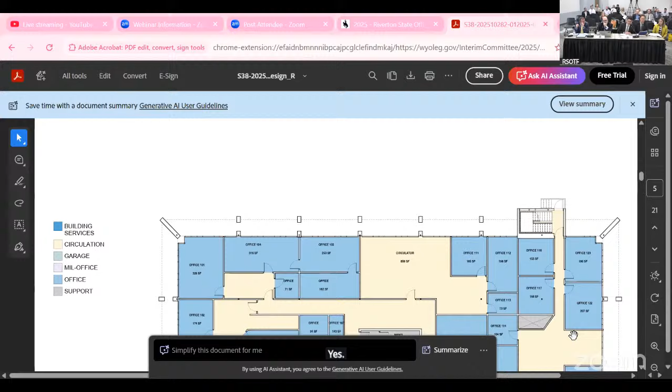CMU is a block, just a concrete block. That's where the current bathrooms live and provide shear for the floor. But for the most part, the rest of the floor is just infilled framing, which allows us to remove a lot of those infills without really damaging the structure at all. And then we can come back with that infill to appropriately scale and size the rooms as needed for the program.

On page 7, you'll see this is the upper level floor, and what you can see on the existing floor is that most of the offices were pushed around the perimeter of the building, with quite a lot of open space in the middle as well. The rooms, as we discussed, were for more executive level people, and they're quite large. So one of the purposes of revisiting this upper floor was to try to economize this, because we have quite a bit of program.

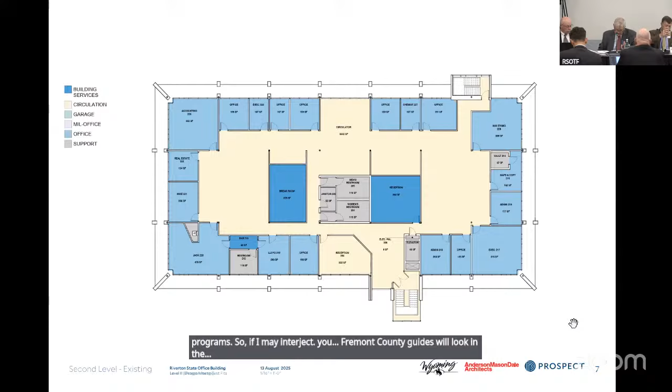So if I may interject, you Fremont County guys will look in the lower left-hand side, Jack 220 -- that was Jack Larson's room. Then above him is Mike Sweeler's office. Then you come to Max Evans' office, which was then turned into Scott Lormer's office. This is a fun document, a lot of history for those of us that knew the company that was there. It's pretty fun. Continue -- I digress, sorry. Thank you, Mr. Chairman. No, it's good. It's good color.

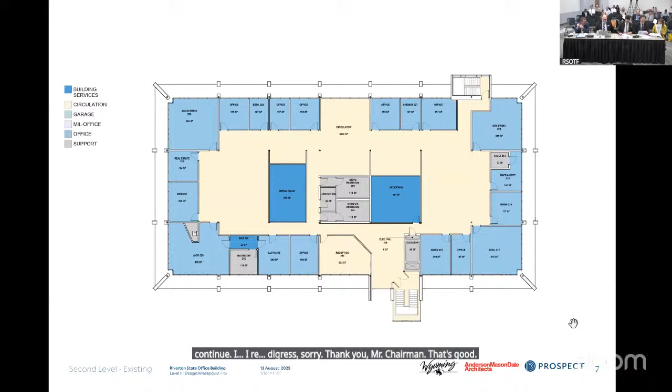So one of the other elements I think I failed to mention was that as part of the preliminary review of the building, a few things came to our attention as we analyzed it. The first thing we did was evaluate the existing structure and services in the building to ensure we knew what we were dealing with and whether there were any upgrades or requirements needed. Several things did come out of that.

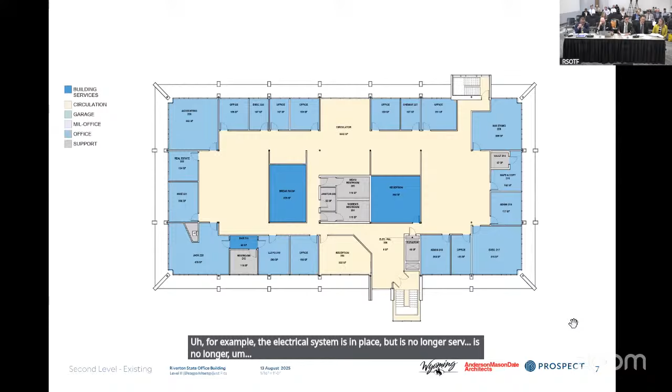Most of the utilities in this building are quite dated. For example, the electrical system is in place, but you're no longer able to get parts and pieces for it. So long term we're going to need to upgrade those facilities as well as the boiler and the mechanical systems. Those were things we noticed.

Additionally, the elevator was quite old and in a state that wasn't able to be repaired. One challenge we faced is that this is quite a small elevator, so for current needs and requirements we were going to need to expand that elevator shaft.

So that gave us a bit of the workings of not only what we were trying to solve from a program standpoint as it relates to fitting all the agencies in the building, but also what we needed to do to ensure this is a long-term and viable asset for the state.

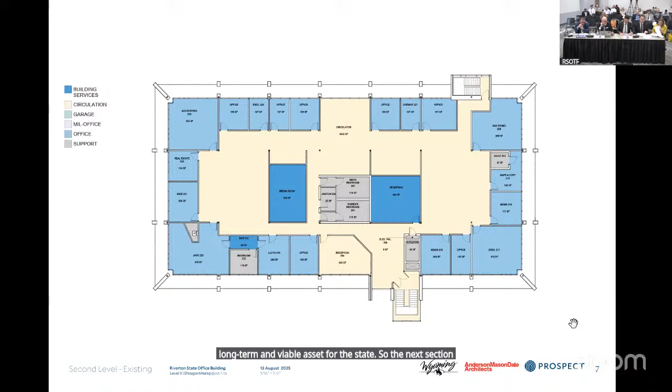So the next section you can see on page 10, this was the preliminary concept design. We've been talking predominantly about the building, but we also looked at the exterior parking and accessibility. As you'll see on the site visit, there's a two-tiered parking area. The drainage is quite bad, and it's not in great shape in terms of the paving.

So solving the stormwater issues on site was one driving force, and also positioning the parking lot in a way where we could maximize the number of spaces, while providing an opportunity -- as you can see in this document, the building is only a portion of the site. There's quite a large bit of the site on the south end. One of the original briefs was to look at this from a master planning standpoint, to ensure that anything we were doing in this first phase could set up a viable campus for the state long term.

By taking the parking out from just the front of the building, it allows us to create a pedestrian access to that southern portion of the site. I think the other really notable thing here is currently the state vehicles are parked within the same parking as the public. So what you'll see here is we actually separated this on the left coming off of North 8th Street.

You can see that there is a turn-in, which is where the current primary turn-in is. This would actually access a secured parking area only for state vehicles. It's also the access route to get down to the garage. So you would go through a state-controlled parking area in order to access the lower garage. We think that provides more security.

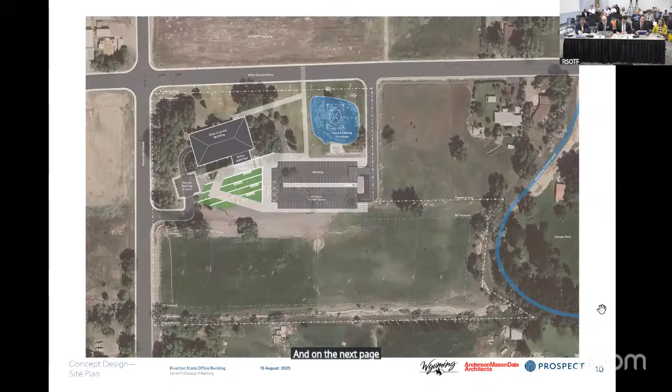So by replacing the parking here, we were able to reduce the amount of elevation going up to the building. We do have a long ramp, which is this diagonal element that comes up to the front, but there's a much more direct route from the parking area. So we were trying to solve for the multi-level condition that we are also seeing on the parking right now.

Page 12 shows a small axonometric view of what the building is going to be. This front element is an addition that we've added onto the building, which you'll see in the new plans. The reason for doing this is it allows us to rebuild that exit stair that we need in the front and also reposition the elevator so that we could build a new modern elevator. It also provides a kind of a front porch to the building and a more gracious entry.

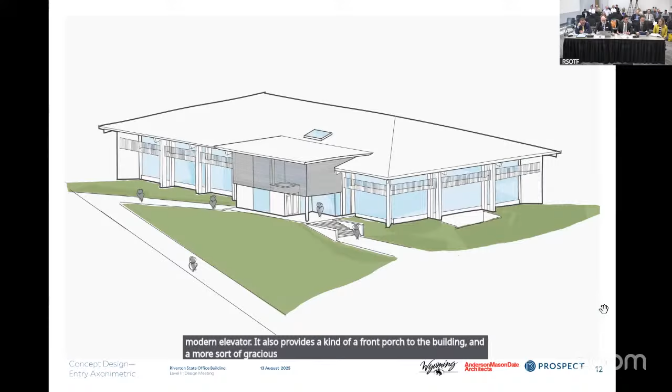When you go there now, you enter the front building and you come onto a landing and it's like a 7-foot ceiling. So this has a portion of double height space. It connects the second and first floor, and we think it provides more of an entry sequence that you would expect in a state facility such as this.

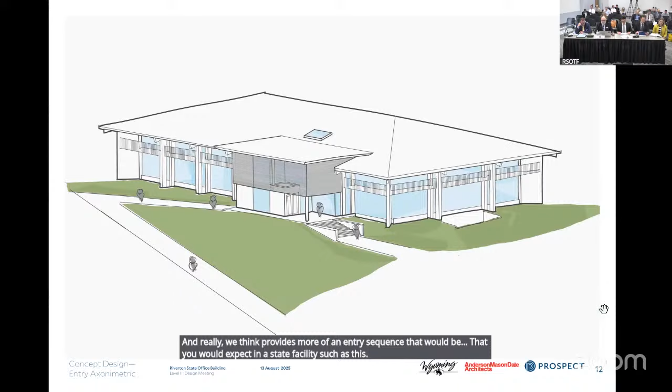So this concept imagery on the bottom is really just us starting to think about how to link this together and to provide some screening and connectivity for the building.

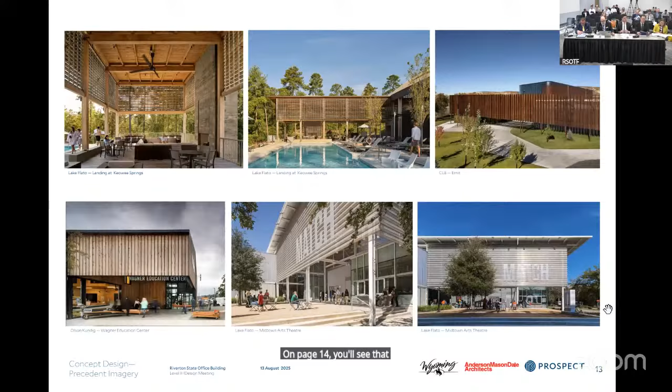On page 14, you'll see that these started to be the concepts design and plans for the new layout of the building. This is the subgrade plan. So in the parking, current garage area...

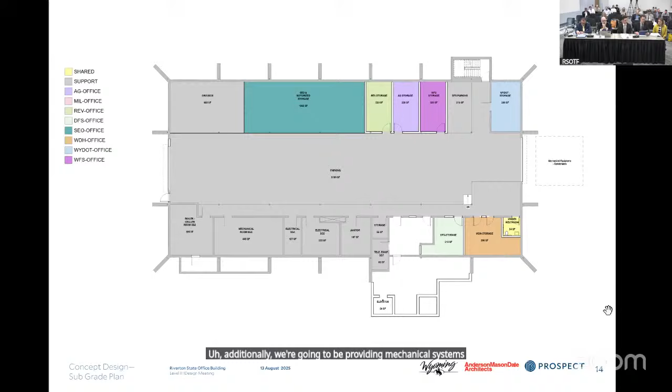We are basically using this area for storage, both for the grounds team, the state engineer's office, and then a series of the agencies that will be housed above, as well as the services for the building. Additionally, we're going to be providing mechanical systems. Currently, there's a chiller that lives in the front lawn, and this would allow us to bring that closer to the building, reduce the length of those runs, and provide a more accessible unit for maintenance, etc.

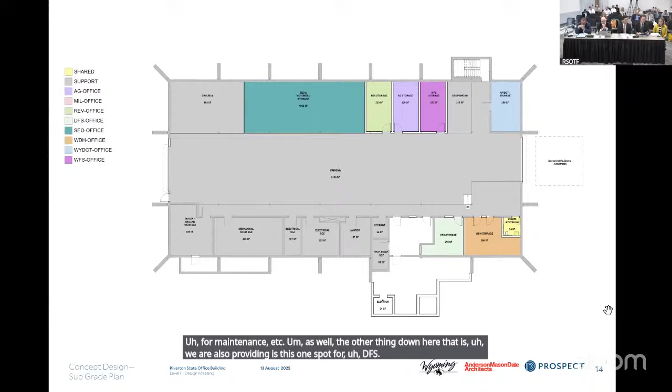As well, the other thing down here that we are also providing is this one spot for DFS, in the event that they need to bring someone and have straight access and not walk them through the parking lot. This will allow them to be able to pull a car in and go straight to the elevator and then take someone to the upper level.

So if I may interject there, looking to Jen, but of the agencies, DFS is one that has off-hour requirements to come at all hours of the day, and off times would have to have access at night and come in at weird hours, and this added a level of security for those employees. Have I got that accurate, Jim?

Mr. Chairman, that's accurate.

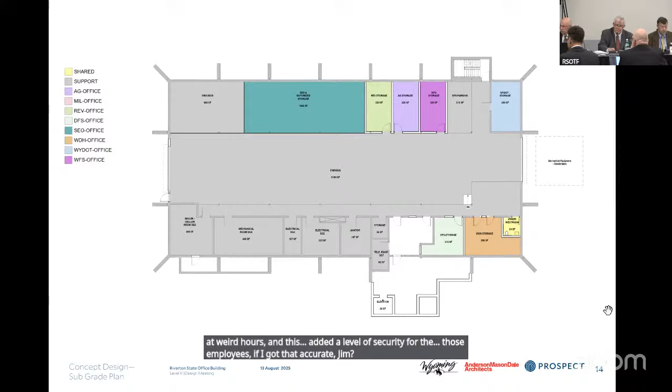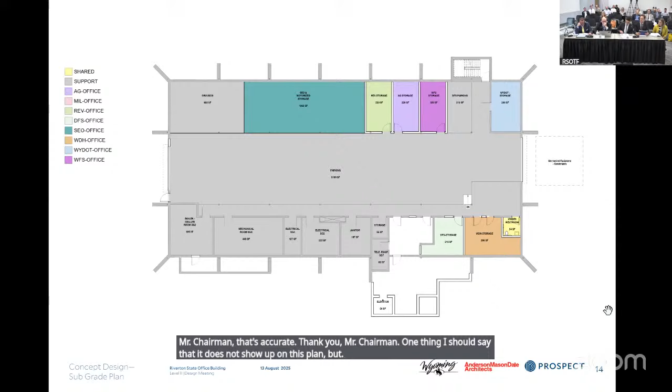Thank you, Mr. Chairman. One thing I should say that doesn't show up on this plan: the stair on the south side of the building would communicate all the way down to the subfloor, so that would be an access for us as well. That's just a drawing error on our side, but those stairs would continue all the way down.

Also, for the members here today, if you look at the bottom you'll see an SEO and motorized storage. As we looked at the agencies in Riverton, the one agency that we didn't move into the building was the state engineer's office. They had run out of room, and their office space was okay, but they have some storage needs. They're a regional facility, and some of the motorized vehicles and testing equipment they use up in the Bighorn Basin and other parts of the area are stored here in the winter.

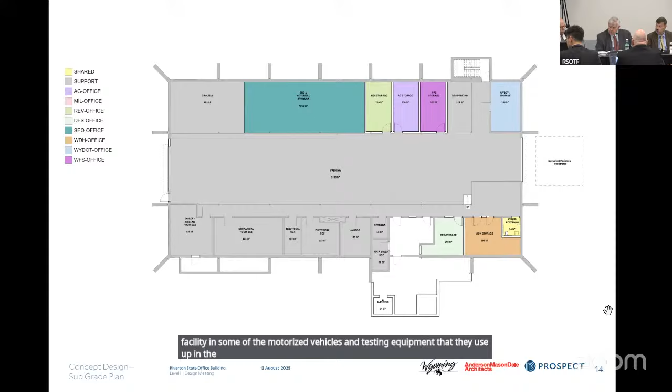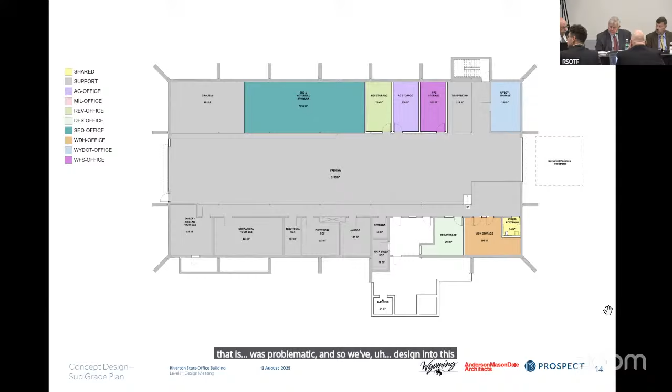They have a small storage building that they make repairs in and store things, and that was problematic. So we are designing into this lower area some space where they can keep their motorized vehicles in the winter, their side-by-sides, the boat, and some other things. That's why you'll see that agency on the lower floor, but no other place.

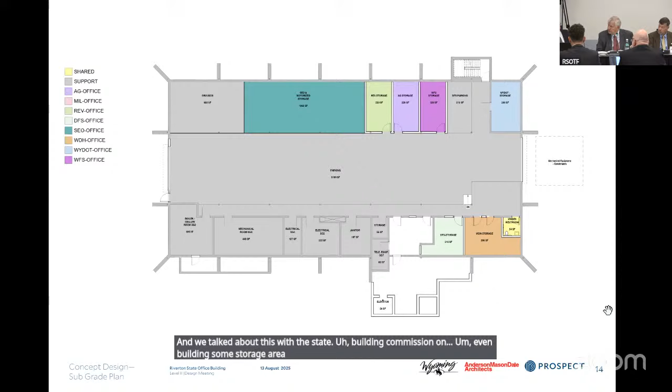There may be a time in the future on this campus, which we talked about with the state building commission, of even building some storage area for each of the agencies outside of this building. That will be a conversation in the future, but for right now, this is how we take care of the state engineer's needs, as well as the other agencies.

Thank you, Mr. Chairman. That's accurate.

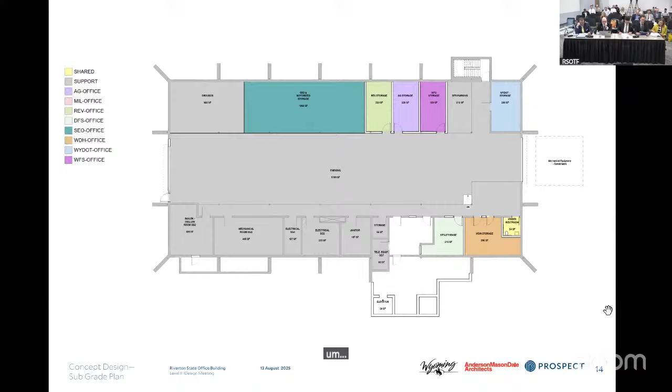Moving on to page 15, this is the concept design for the lower floor. If we start on the south of the page and move into the building, there is an airlock and entry where the elevator and new stair would be built. There's also the possibility and an allocation for a security desk, depending on how the building is staffed and run long term.

You can see we have three agencies on the lower floor with some shared space. One of the things we were trying to do in the layout of this building was to provide spaces that could overlap between the agencies so we didn't have redundant program, because once we did the programming assessment, the needs of some agencies were a little larger than the allowed footprint. So we were trying to consolidate some of that through shared uses.

You can see the Department of Workforce Services is on the left side of the building. They occupy the primary share of the lower floor. We provided new restrooms, since the current restroom facilities are not ADA accessible, so we're providing new ADA accessible restrooms on both levels. The yellow represents the shared elements.

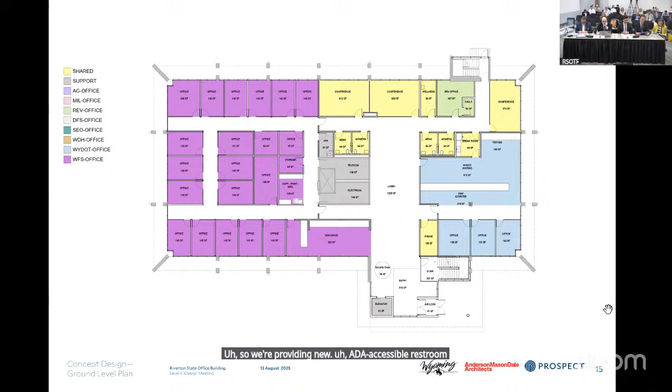The purple represents Workforce Services, and blue represents WYDOT. The yellow or white spaces are circulation, and we're sort of using that central space as a kind of lobby space for each floor.

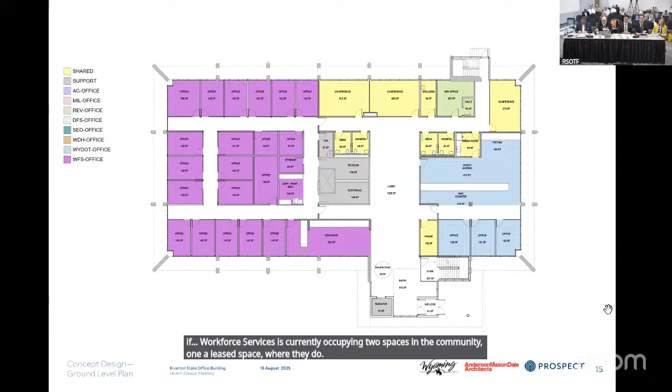If I may interject for my legislative colleagues: Workforce Services is currently occupying two spaces in the community, one a lease space where they do voc rehab. The reason that's a separate space is because the state-owned office space where the other part of Workforce Services is located isn't ADA approved. So they have a lease space for voc rehab, and there's a bifurcation of the agency that was a challenge.

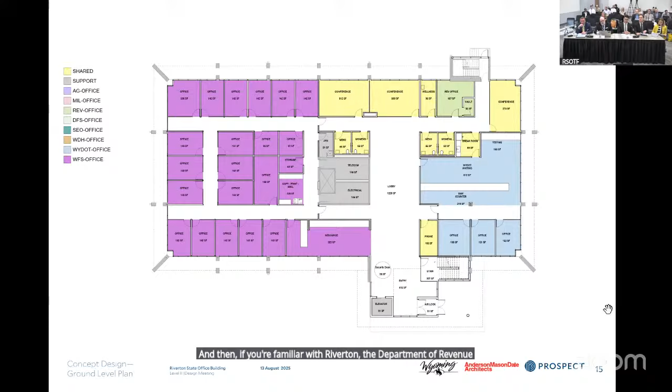This brings the whole agency into this level of the building. Off to the right, where you see WYDOT, that's our driver's license administration. They're currently there; we reconfigured that a little bit. And if you're familiar with Riverton, the Department of Revenue has this office kind of in the hinterlands, isolated and a little concerning. We're glad that we're able to bring them into this consolidation.

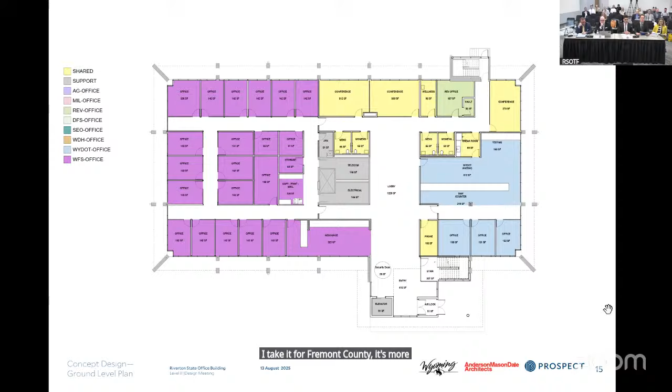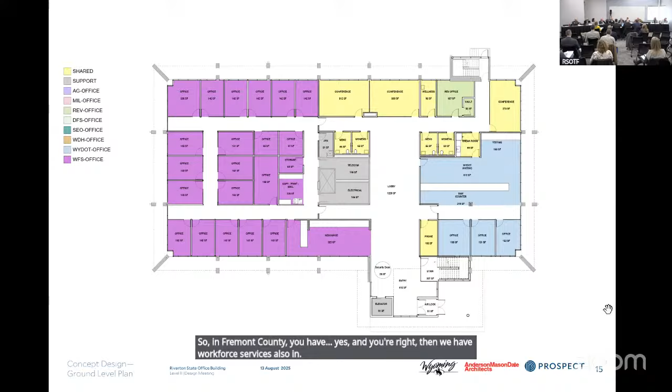Senator Dockstader: Mr. Chairman, Workforce Services then, I take it for Fremont County is more like a regional approach as far as rehabilitation, training, all of that, because a lot of the offices I've seen are just simply a little office. So in Fremont County, you have - yes, and you're right. And then we have Workforce Services also in an office in Lander. Thank you, Mr. Chairman.

Both the layout and development of these were in close collaboration with the agencies. So how you enter into the resource center and then have closed off access to the offices beyond were all things discussed through those agency meetings to make sure this was going to operate the way that best suited what they wanted to do in the space.

Same goes for the revenue offices. You can see there's a small vault in the corner, and that way for night drops they could drop directly into the vault. So all of those types of elements were things we were discussing with the agencies and went into this preliminary layout.

As we move into the level 3 work, we'll be developing this in more detail with them. But all of this was informed through multiple meetings to ensure we weren't saying, oh, it fits, and then having them say, but this doesn't work how we needed it to at all. So there was quite a lot of collaboration with them on that front.

As another example, the two shared conference rooms have a removable partition between them, because Workforce Services many times needs a larger space to do a job fair type of situation or have a speaker. So they asked that we combine those two so they could have one larger space when needed.

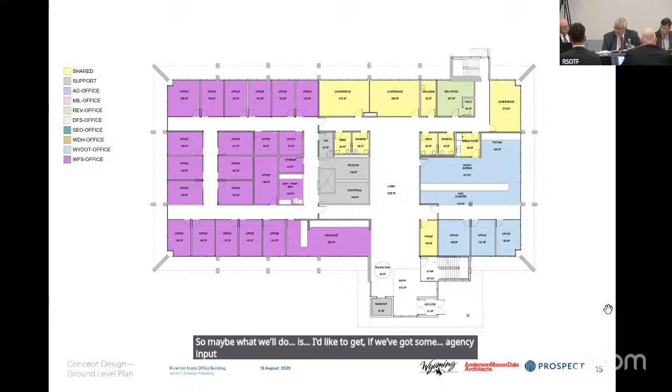If there's no questions on this floor, I'm happy to move to the other one. So maybe what we'll do is get some agency input as we've gone through that, just to make sure the agencies don't leave this meeting saying, geez, that ain't what we agreed upon, and we had some other thoughts here.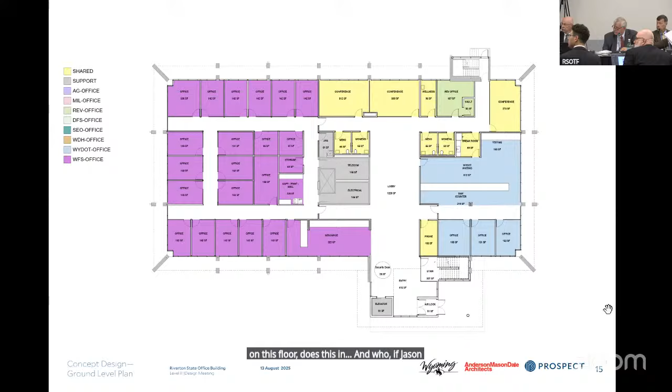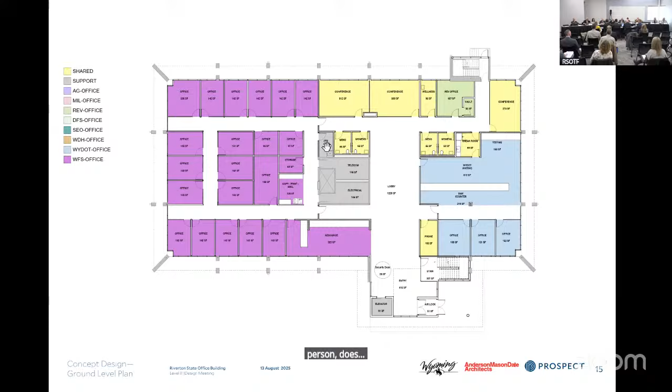I'd like to reach out if we've got Workforce Services here on this floor. Jason, are you online with us? So I'm going to pick on our local Workforce Services person. Is there anything that runs afoul of your understanding on this, or does this fit? Come on up.

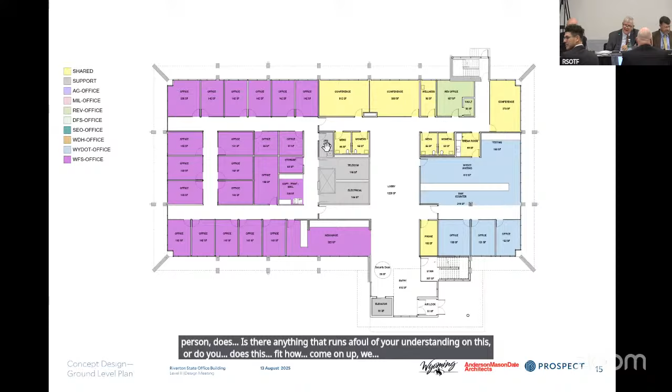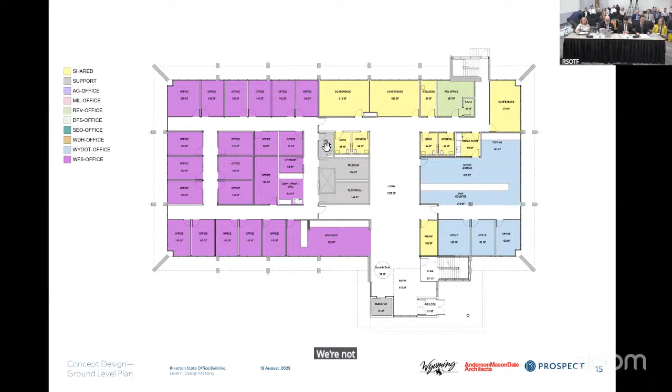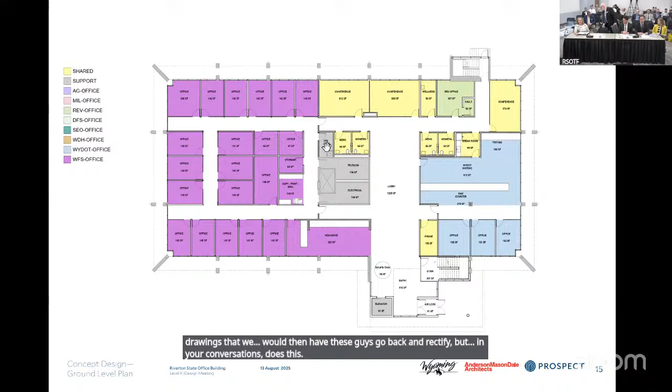And we're all friends. I'm putting you on the spot, but I just want to make sure we're not missing something, or that you have angst over something on these drawings that we'd have these guys go back and rectify. But in your conversations, does this fit the intent of consolidating your agency into the building?

Representative Larson, my name is Deanna Crofts. I'm the manager for the Riverton Workforce Center. Jason Wolfe, our deputy director, was the designee to talk. I haven't been involved in some of these discussions, so I would have to defer.

So let's do this, this will be a little assignment. If you just reach out to Jason and have him make sure and get back with Dave and Jake. Absolutely, and just confirm—I'm confident we've done this and responded appropriately, but just wanted to make sure the agencies had a chance to opine on the space allocation.

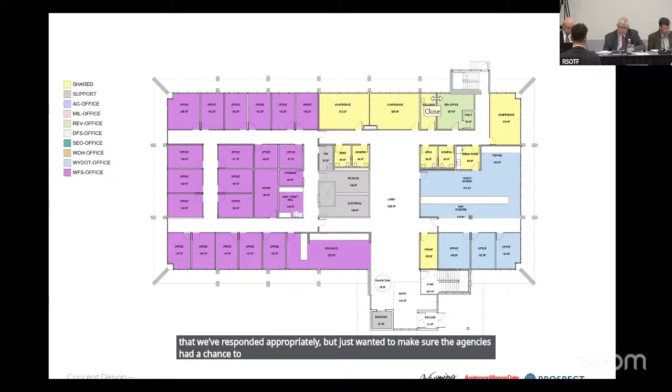Thank you, Mrs. Crofts, for being here. Thank you for the opportunity. We have Department of Revenue here. Okay, and how about Department of Health?

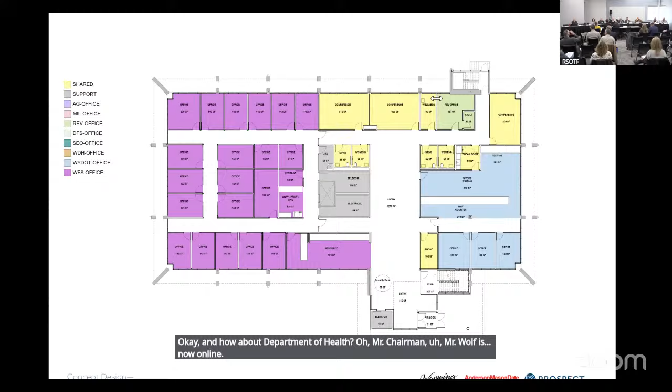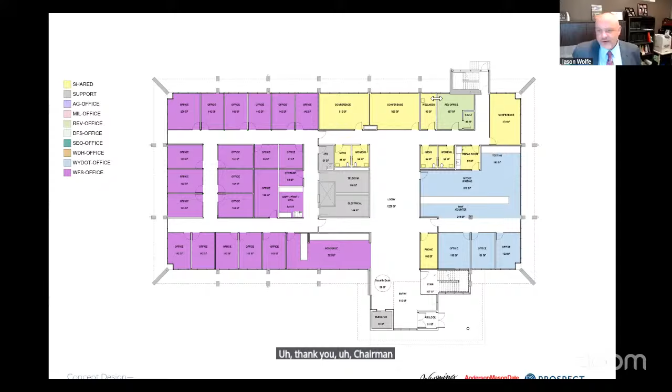Mr. Chairman, thank you. Mr. Wolfe is now online. Good morning, Jason. Hey, good morning, Representative. Can you hear me okay? We can, thank you. Chairman Larson, Jason Wolfe, Deputy Director for Department of Workforce Services.

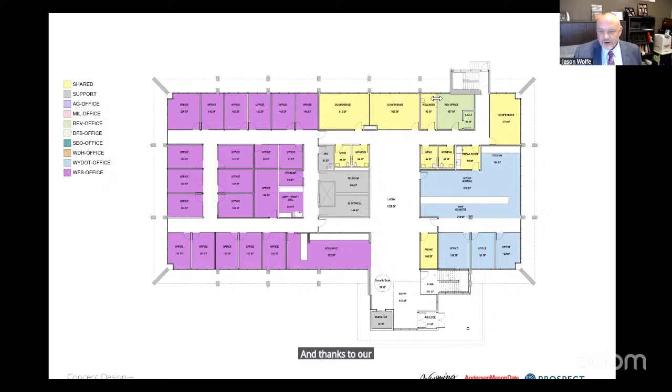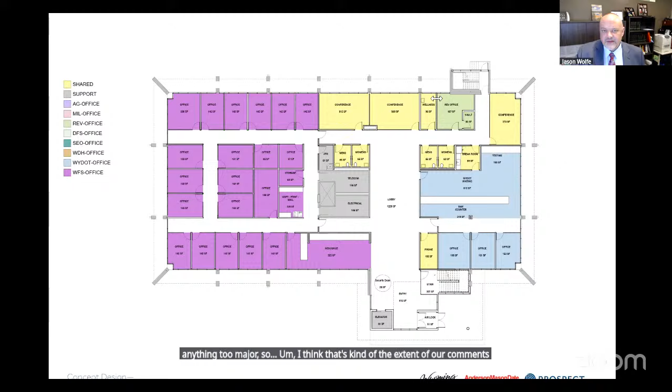Sorry, I didn't raise my hand earlier, but thank you for letting me in, and thanks to our Workforce Center Manager Deanna for pitching in. I'd just say we've done a lot of discussion with the architect team and internally. I think on level 3 there may be some opportunity for rearrangement as we've discussed internally, but I don't think anything too major. So that's kind of the extent of our comments on the office space, but I'd stand for any questions, Representative.

Questions for Deputy Director Wolfe from anyone? Jason, thank you, appreciate you being here. Thank you. Do we have anyone?

Mr. Chairman, we have Director Karen Fanning. Is it Director Fanning that's with us? Sharon Rehm from the Department of Revenue. Sharon, thank you, can you hear us?

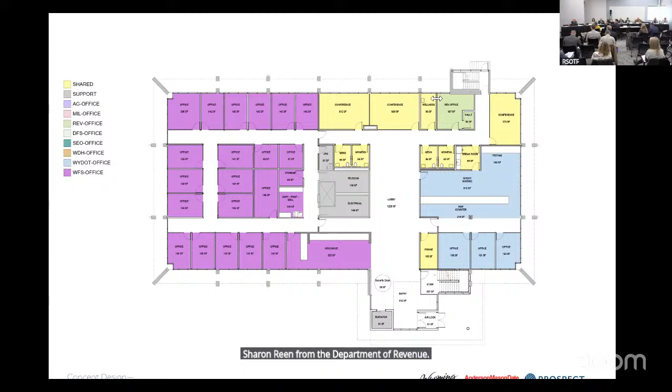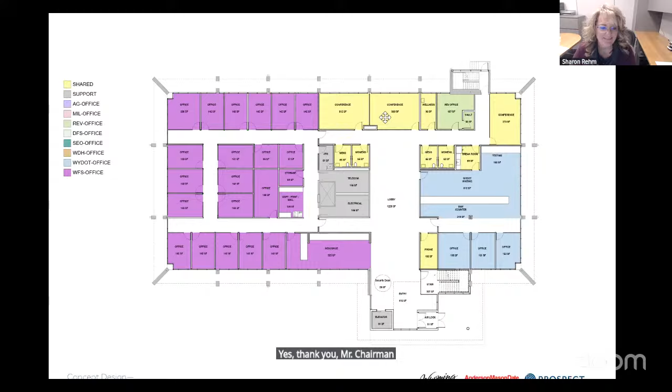Yes, thank you, Mr. Chairman. Can you hear me? We can now. Thank you for joining us. Thank you so much for having us. Yes, we were able to contribute to the decision-making with that office as well. We were very happy with it.

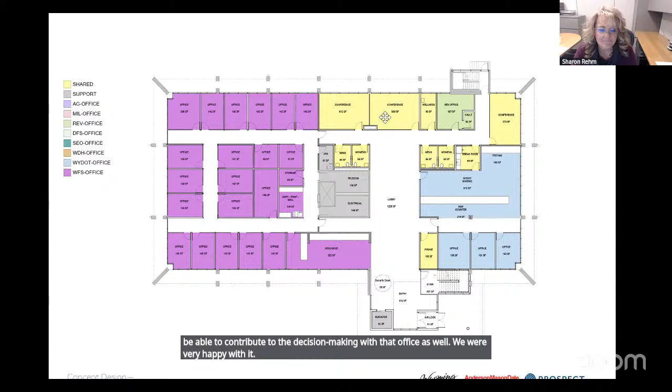Any questions for Sharon? Sharon, thank you, we're really happy to get that space moved over from where you're at. I know it served you reasonably well, but it's just isolated, and we're really happy to have it consolidated in this. So thank you. Yes, thank you, Mr. Chairman, it was nice to have that safety there, because it's nice to be in a building with others.

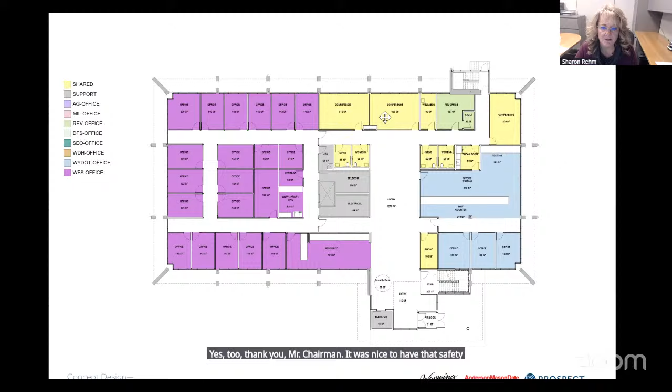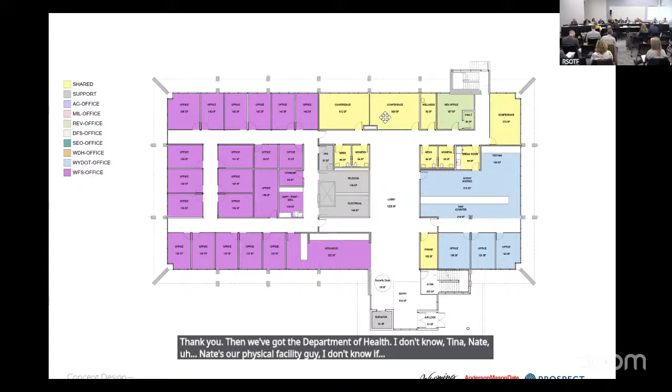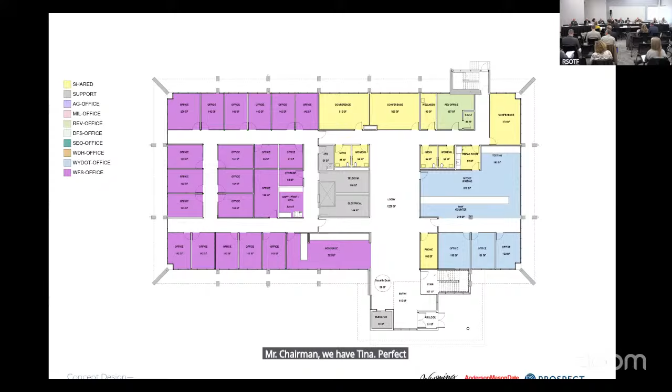Thank you, then we've got the Department of Health. I don't know, Tina, Nate—Nate's our physical facility guy, I don't know if it's him or Tina that's going to comment on that space. Mr. Chairman, we have Tina. Perfect. Kearney—that's who we wanted.

Mr. Chairman, I'm not sure if it would make sense for us to move to the next page, as they're on the second floor. Oh, I apologize. No, you're right, time out. I misspoke, I'm colorblind, not really, I'm just claiming that as my excuse. It's WYDOT, we need our WYDOT guy who's here with us, who drove up, and that's where we do that. So thank you for catching that. My pleasure, sir.

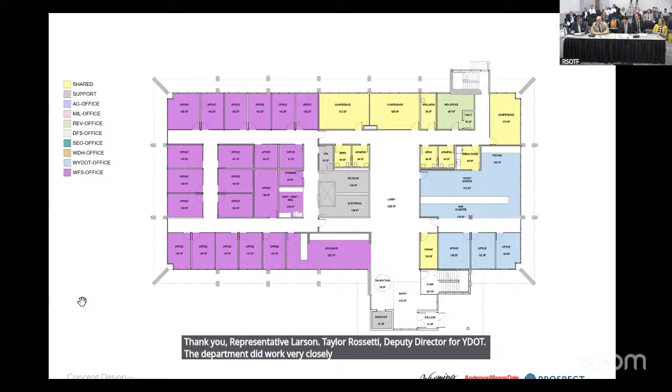Thank you, Representative Larson. Taylor Rossetti, Deputy Director for WYDOT. The department did work very closely, as you guys mentioned, in the process. We're pleased with how everything turned out, and we believe that'll meet our needs in the current configuration, and we'll continue to work through phase 3.

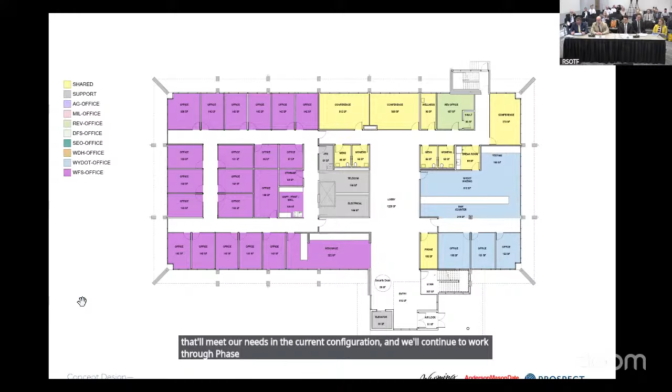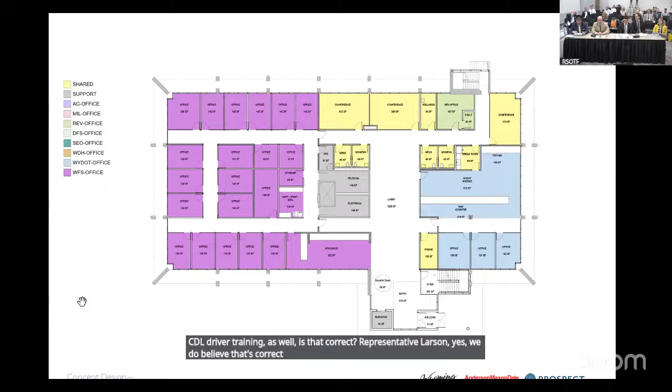Thank you, and while we've got you, Taylor, we've got that property across the highway that you guys have access to, to develop into your CDL driver training as well, is that correct? Representative Larson, yes, we do believe that's correct. We'll probably do some motorcycle testing there as well. Perfect, thank you. Currently, you just kind of beg, borrow and steal around Riverton to find space to do that? Representative Larson, the motorcycle testing is actually done in the current lot here at the current building that they're in now, and the CDL testing is done out at the fairgrounds. It works well, but it's not optimal in the winter, it's still a dirt lot, so that poses some problems during the winter. Having a paved lot close to the location would be beneficial to everybody. Thank you, appreciate it.

Now, how about we go upstairs? Absolutely, sir, thank you. I should also mention that relative to the CDL and motorcycle testing, that was one focus also with the revised parking, to try to, with the state acquiring the land to the north, we knew that could be a future place to do that. As you'll see today, it's a little confusing when you pull into the parking lot whether you can drive where the testing is or park in that zone. So separating those two functions seemed to be a benefit to the public.

So if we move to page 16, you can see the upper floor. Starting on the south end, you'll have access via the stair or the elevator. The stair on this end will be the primary stair for the public. The stair on the north side of the building will be used for egress purposes, and also for the different agencies to be able to move up and down. But we'd like to try to focus the public on this south aspect of the building.

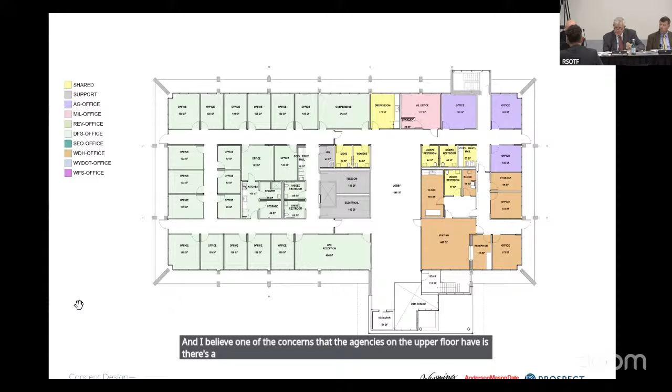I believe one of the concerns the agencies on the upper floor have is there's a component of drug testing or other type of testing that required that to be inside, which is why you see some additional restrooms there. Is that correct? Yes, Mr. Chairman, the restroom being provided inside the Department of Health is specifically for some of their needs and was requested by them.

There are also several restrooms inside the Department of Family Services, along with a shower component. This is related to the work they're doing, and they wanted a more private facility that they could control a little better.

Okay, questions on this before we go to agencies?

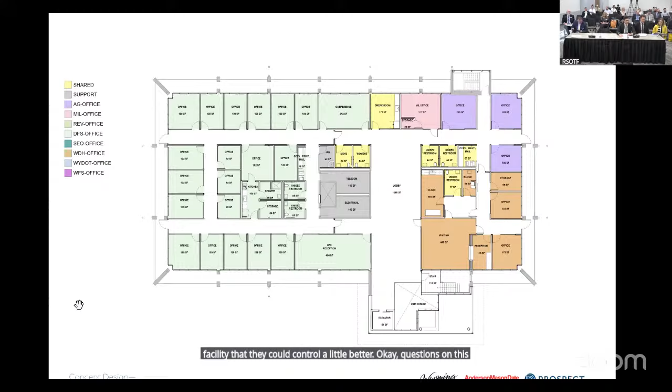Now let's go to the Department of Health. Tina, is she there? Mr. Chair, can you hear me? We can hear you. Can't see you, but we can hear you. Your thoughts, please? There you are. We can see you too.

Thank you, Mr. Chair. So the space sufficiently meets our needs. We are really pleased with what we have, and no further comment.

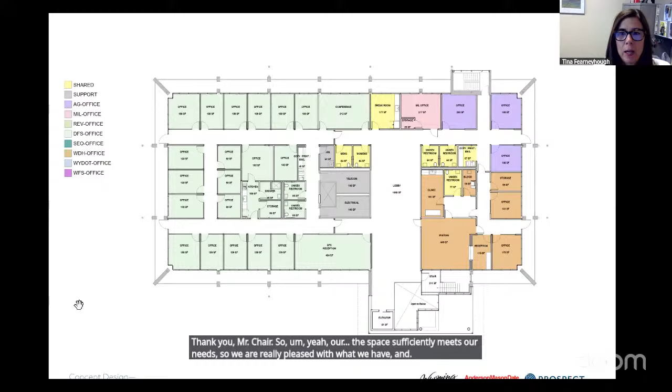Thank you. Any questions for Tina? Okay, thanks, Tina. Appreciate you spending time with us this morning.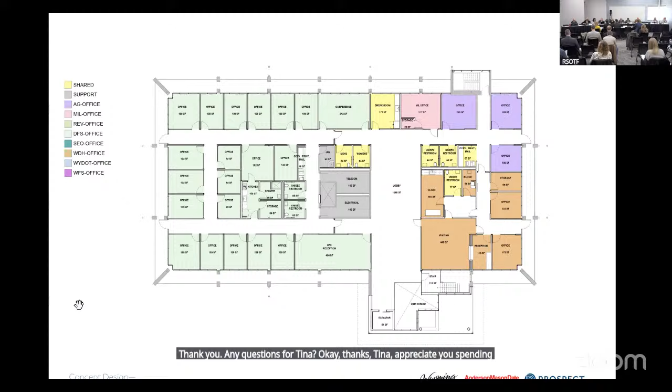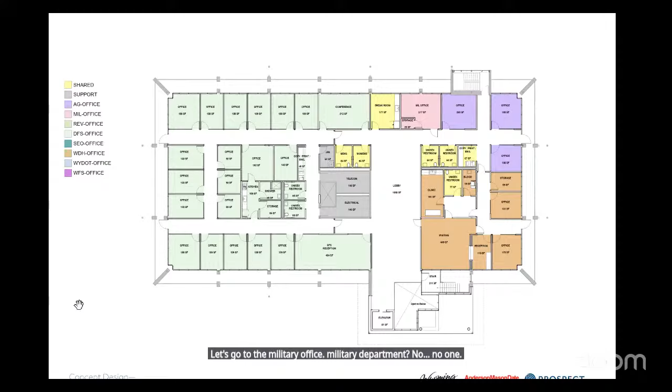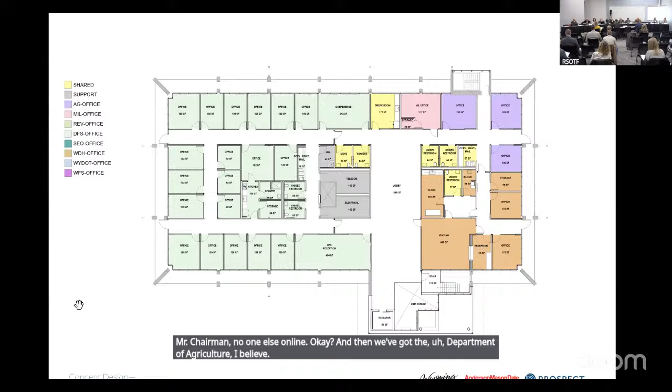Let's go to the military office. Military department, no one? Okay. Mr. Chairman, no one else online. Okay, and then we've got the Department of Agriculture, I believe. And no comments there. Really chatty today.

We are. I would just share again with the committee, those of you who knew, we have had lots of chattiness. We spent a lot of time with the agencies getting this ironed out, and just wanted to reaffirm that. So I'm not really surprised that they're not there. The military department has an office downtown right now that they'll be getting rid of, and Department of Ag was already in the building. They're down on the first floor.

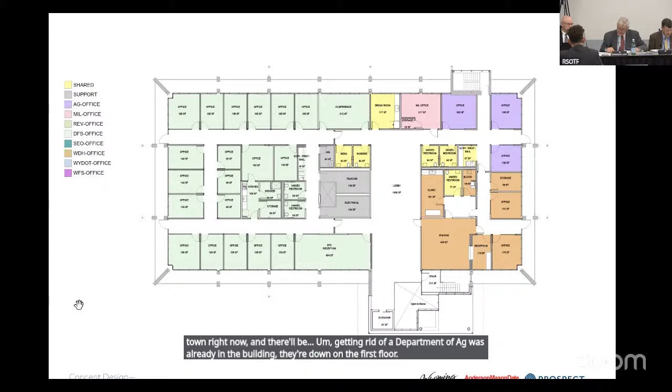DFS, Mrs. Neely, we're always glad to have you in our presence. Oh, thank you, Mr. Chairman. Thank you for having us.

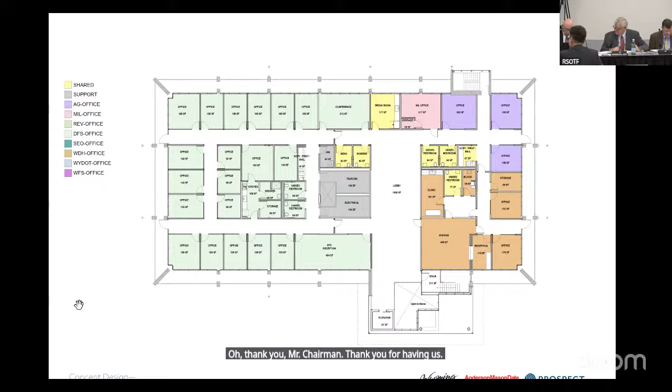I do have two questions, but this might be a level 3 question. So Mr. Chairman, I'll ask them and maybe get some clarification. At one point, we had discussed conference room number 312 becoming an interior space, which would enable 2 of those interior offices to become exterior facing spaces with windows. Is this sounding familiar?

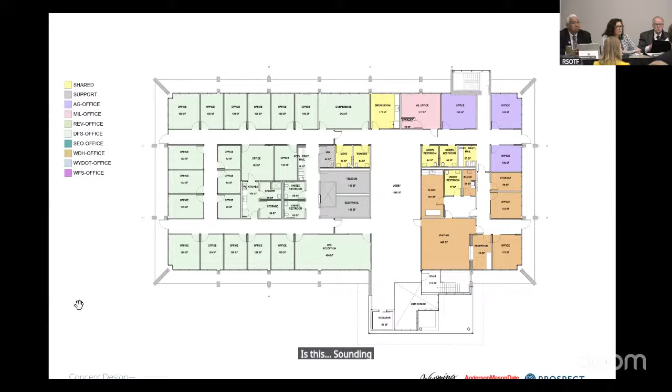Mr. Chairman, I could address that if that's all right. I think we did discuss that. One of the reasons we left it in place, which we'd be happy to re-review in level 3, is that having 2 doors to that conference room allows access from behind your secured door, but also provides the opportunity for someone from another agency to come in, since this was originally a shared conference room that we converted to primarily DFS use. Moving it internally would have made that not possible. So we left it for that, but we're happy to re-review it with you when we get into level 3.

Thank you, Mr. Chairman. Thank you for answering and clarifying. I think my second question is also going to be a level 3 discussion. So thank you. Absolutely. No other questions or comments, Mr. Chairman? Thank you, Chairman. Please, Dave.

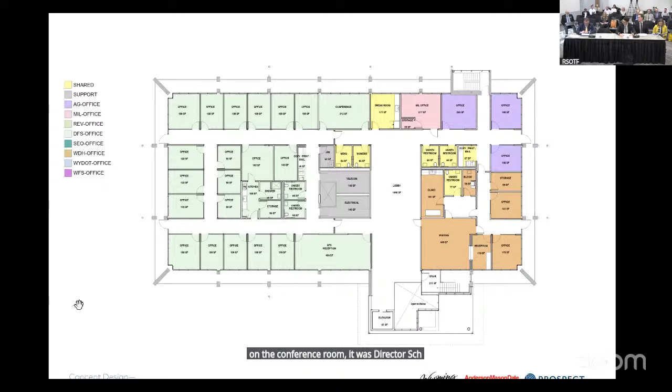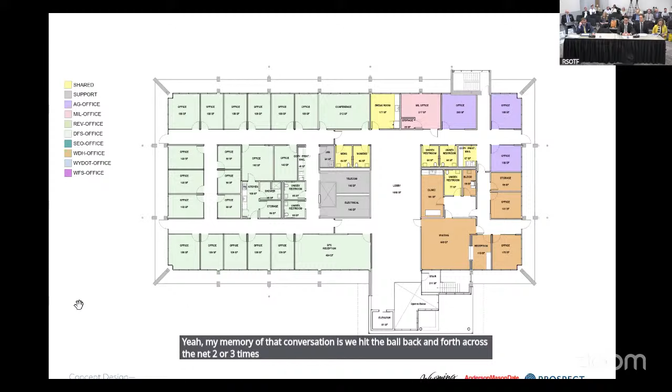If you can remember the last time we went through with the agencies on the conference room, it was Director Schmidt that made the comment of leaving that conference room on the exterior and having the 2 doors, so they could, if they had to, lock that one door that's outside of their agency and use it for their own purposes. My memory of that conversation is we hit the ball back and forth across the net 2 or 3 times in that discussion, and it ended up there, not more as Prospect noted, more as practicality than desire.

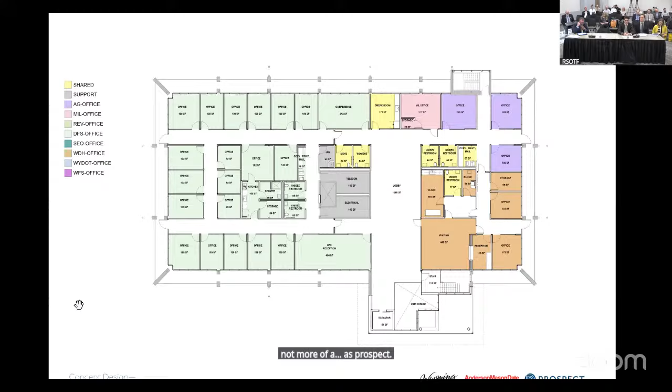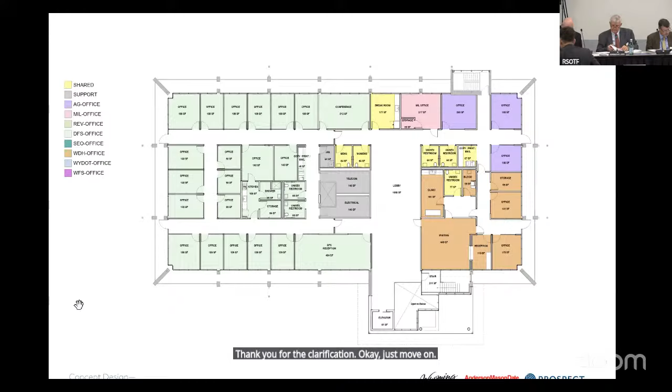Mr. Chairman, if we look at the next page, page 17, these are elevations of the building. Starting at the top and working down on the left-hand side, this shows the existing elevation, and the red represents what will be removed. The lowest elevation shows the final look. These drawings are a bit more minutiae, but just like the mechanical systems, this building was built quite a long time ago, so the window systems and envelope are quite old. We think it would be prudent to upgrade those to a more current and energy efficient envelope so it costs less to operate the building. So this is replacing the windows on the exterior.

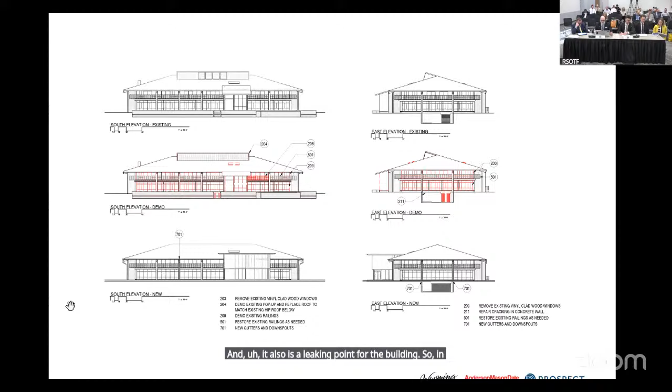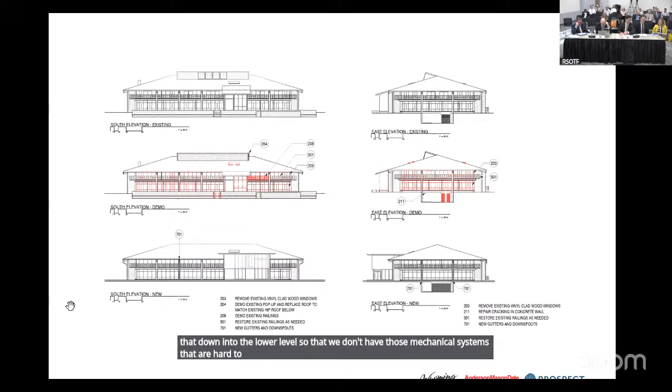Mr. Chairman, one more thing on this elevation: on the right-hand side showing the eastern portion, you can see on the upper roof a kind of funny triangular shape. I believe this was included originally, but this is a small mechanical penthouse that houses some mechanical units on the upper floor. It's nearly impossible to access, and it's also a leaking point for the building. So in reevaluating the mechanical systems, we've come up with a way to move that down into the lower level so we don't have mechanical systems that are hard to access and maintain, and we're able to remove that area and re-roof it so it's a more conventional roof. We think that's a much better long-term solution.

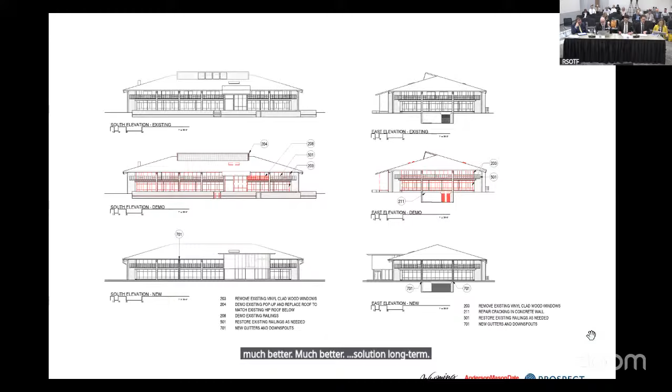If you look at the last page, this represents additional elevations on the north and west side, showing more or less the same thing. We're also proposing to remove many of the skylights on the upper floor. The reason is to make these spaces efficient and move the mechanical around efficiently; predominantly above the office spaces we'll have a lower drop ceiling in place, and those skylights are also a leaking point that don't make sense if we're going to have a ceiling in. So we propose removing those and getting this to a roof that's really pretty simple. We think that's a much more viable option long-term.

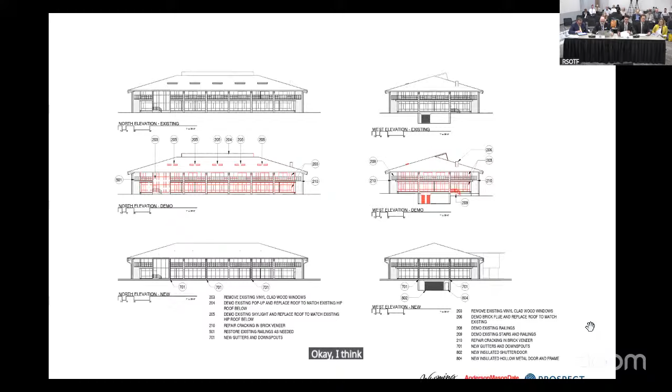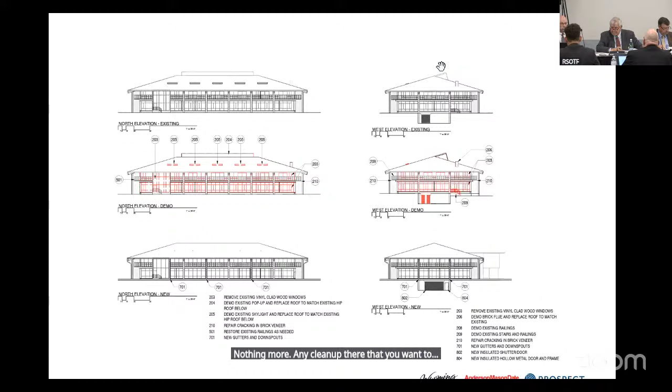I think the rest, the following 2 pages, is just a little bit of history, nothing more. Any cleanup there on the proposed schedule? No, just on the space allocation. Any cleanup comments you'd like to make on that?

I think what you're seeing represents where we think the best plan has been. There have been several test fits of this building - we've done this 7 or 8, 10 different ways to try to figure out how to make all of this work. So we feel like we've really put the work in to find the most effective and efficient layout for the building, and having gone through this several times, we think we're meeting as much of the needs as we can for all the agencies, squeezing all the blood out of the proverbial turnip at this building.

Good, Jake, you and Dave, any concluding comments before we go to questions? Mr. Chairman, yeah, I'd like to also mention that as we wrap up level 2 and move into level 3, we do have a construction manager at risk already. We have a few of their representatives here today - we've hired FCI constructors out of Cheyenne, Wyoming, and we have John Flanagan, Brooks Paskett, and Jake Schmidt here with us today, and they'll be joining us on the tour. Perfect, appreciate that.

Dave, you're welcome to sing. Mr. Chairman, I think we've whipped this horse enough, and now it's time to put this to bed and start on construction documents.